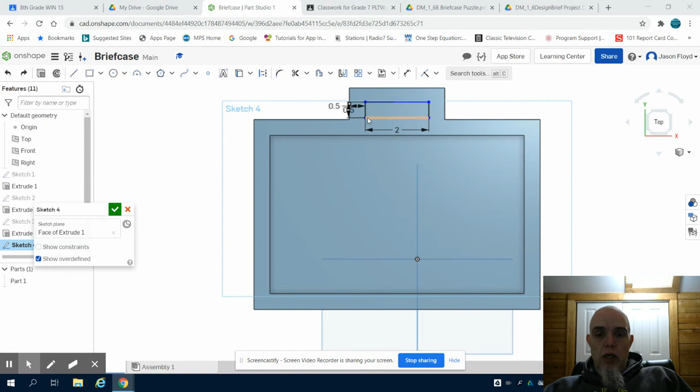In the previous video, we were making the handle, and we had just dimensioned our 2 inch by 1/2 inch rectangle and dimensioned it 1/2 inch from the side in order to center it. We're going to click on the dimension tool now, from the top line to the top line of the outer briefcase, and dimension this at 0.5 as well.

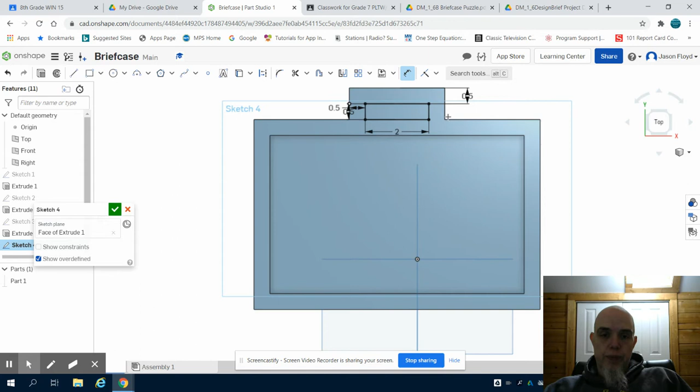Now we're going to click on the extrude button. We're going to extrude that square, but instead of adding material, we are going to remove material. And now we have that completed briefcase according to specifications.

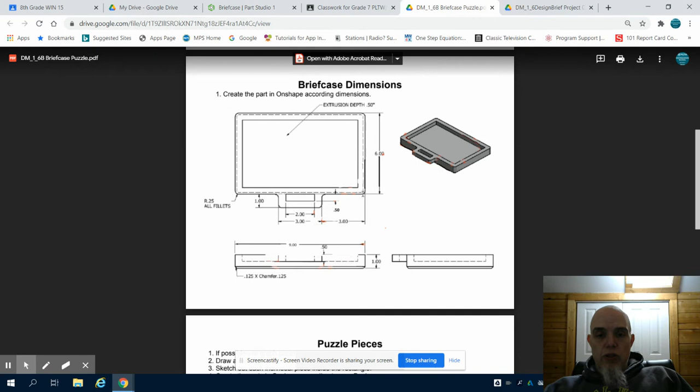The next portion of the briefcase, though, we can see that there's some features added to it. Our corners are rounded, our bottom is chamfered. So we're going to make these decorative changes to our briefcase now.

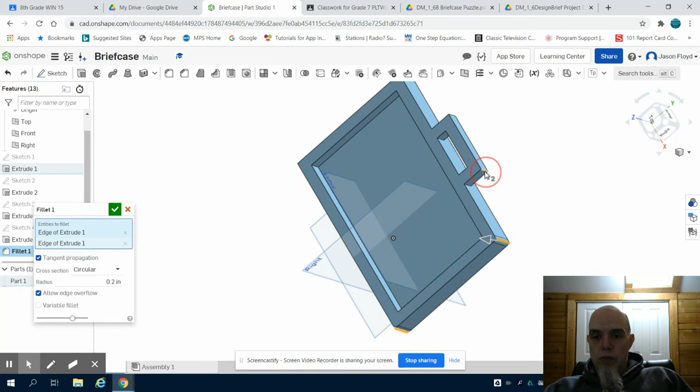All our corners on this are filleted, so if I come up to my 3D tools, I can see my fillet tool. I'm going to click on my corners, and I'm going to fillet them 0.25 inches, which gives us that nice rounded look on our edges.

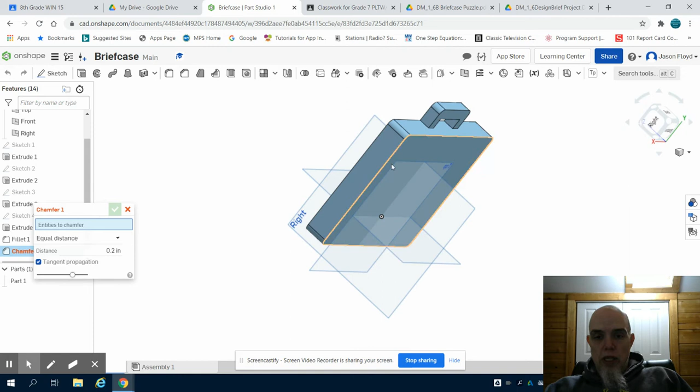The next thing we're going to do is chamfer the bottom edges. So I'm going to select my bottom edges and choose a 0.125 inch chamfer. What we can see is we now have our completed briefcase with those decorative additions.

Now what we're going to see is that the opening we have is 8 by 5 inches. We need to design our puzzle, so we're going to get away from OnShape now and go on to paper and pencil. If you have graph paper, my suggestion would be to set up a scale of 8 squares by 5 squares. But I want to show that during virtual learning, even without graph paper, we can achieve this.

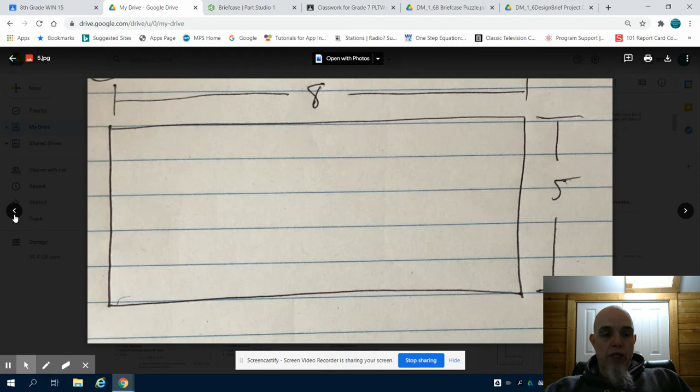I simply dimensioned an 8 by 5 inch rectangle on a sheet of paper. Then what you're going to want to do is, within that, design 5 to 6 puzzle pieces with dimensions.

So again, here's my puzzle piece 1: it's 3 inches, 1 inch, 1 inch, 1 inch as we go around. Puzzle piece 2 is 4 inches, 1 inch, 1 inch, 1 inch, 1 inch, and 4 inches as we go around.

My third puzzle piece is 3 inches, 1, 1, 1, 1, 1, 1 as we go around, with a 3 over here as well. My fourth puzzle piece we can see is 3 inches, 1 inch, 1 inch, and then 4 inches with 2 inches here. And then my fifth puzzle piece here, I have dimensioned out.

Now, if you further need to sketch and put each piece into its own orthographic and isometric sketch, please do so. But what I'm going to use this for is as the basis to create my parts from. So as I go back into OnShape to create my individual parts, my 5 individual parts, I'm going to use this sketch to help build it.

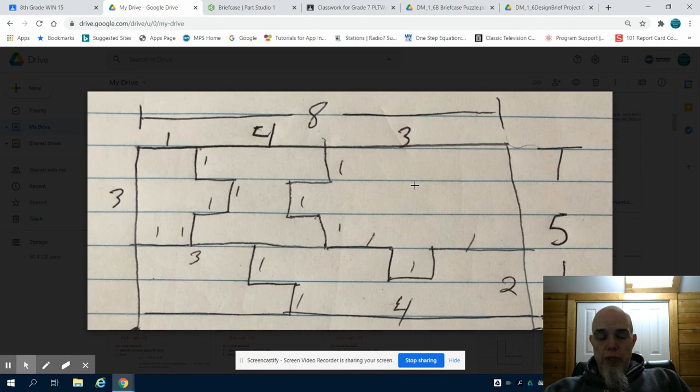It's important to pre-plan this because we do have a constrained space. We only have 8 inches by 5 inches. If you try to free design your puzzle pieces, they might not go together, and they might be too large or too small for the briefcase.